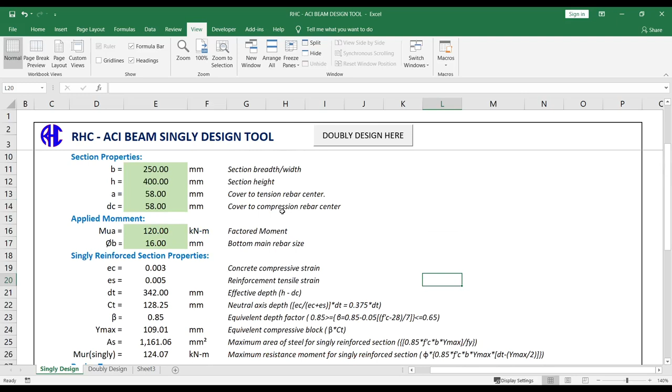Okay, then, of course, our Y-max, this is the equivalent compressive block, which is beta times CT, as you can see in the formula.

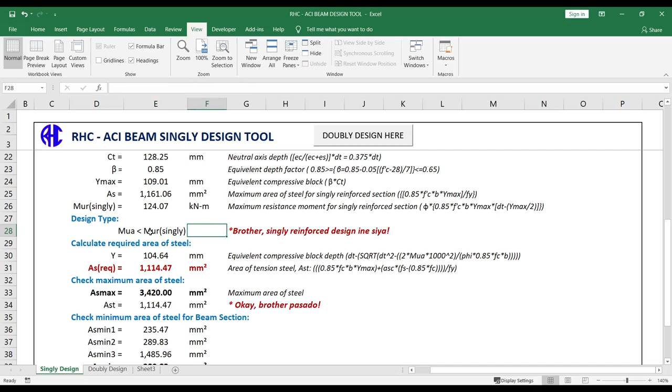Then for the design type, of course we have a condition. If MUA, that is our given moment or the factored moment...

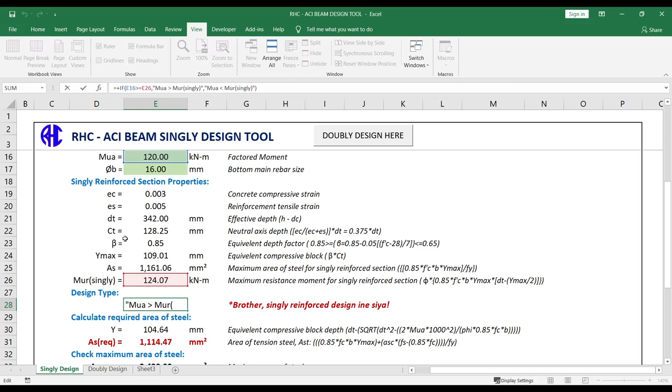the applied moment is greater than or equal to the computed moment for the maximum resistant moment for single reinforced section.

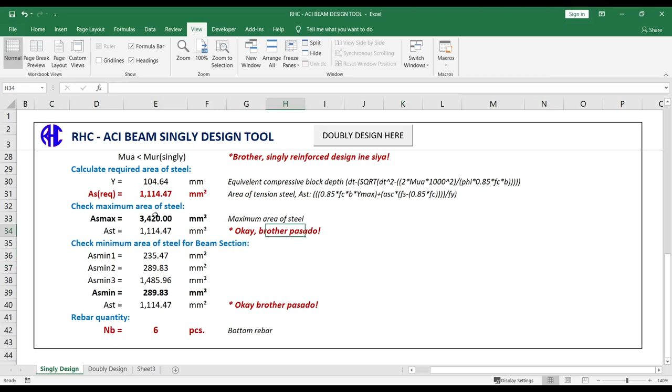Okay, then check natin yung maximum area of steel. Ito yung max natin, 0.04 times b times dt as per the ACI. So as you can see, as you can check in NSCP, iba yung ano natin doon, pero based din yun, yung NSCP based din sa ACI. Check na lang ninyo, okay, so kailangan yung i-estimate natin yung required, kailangan hindi lalampas dito.

Okay, so gumawa na naman ako ng condition if. So kapag yung E34, yung computed area of steel is less than or equal sa E33 or the area max, so safe siya, okay brother, pasado. Pero kapag hindi, not okay brother, increase section.

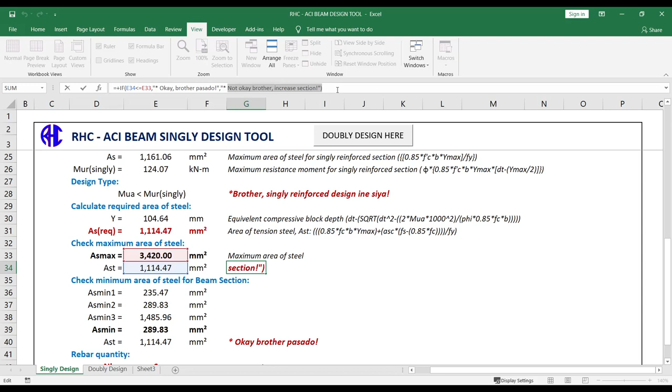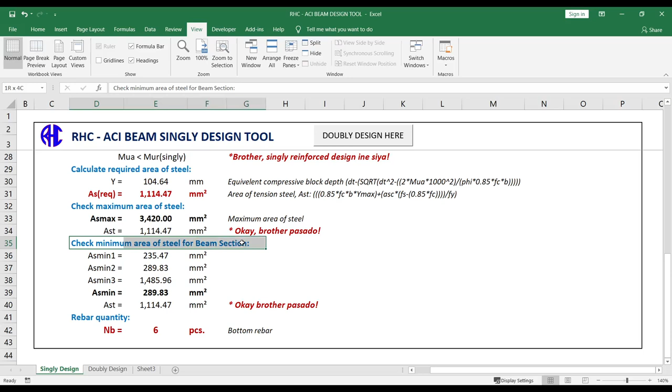Yan, then of course maliban sa maximum area of steel, kailangan din natin i-check yung minimum area of steel, kailangan hindi yan lalampas. Okay, so may tatlo tayo. Una yung 0.25, ito yung formula. Then pangalawa, yung 1.4 b times dt over fy. Then pangatlo, 4 times the area of steel over 3, or simply 4 over 3.

Then ito, hanapin natin yung minimum ng max of E36 and E37. So minimum ng max muna, hanapin natin sa first and second minimum. Then after that, kukunin natin yung pinaka-minimum ng result dito. Tapos yung sa A3, okay, so ang magiging kalabasan niyan is 289.83. So ito yung minimum natin, okay?

So ibig sabihin, pasado siya. Bakit? Kasi lampas yung computed o yung required area of steel natin compare sa minimum. Okay, then computing the rebar quantity, simply yung rebar quantity natin, ito.

Ast, so as you can see may mga pangalan na yan. Ast na yan is the required area na yan. Then As-min, so paano yan ang paglagay? Simply, ito, as you can see, pwede natin to ilagay NB. So kapag i-ano na yan, hindi na yan cell, NB na yan. Okay, so pwede ko yan sabihin 2 times NB. Pag 2 times NB is 12 kasi yung NB natin is 6.

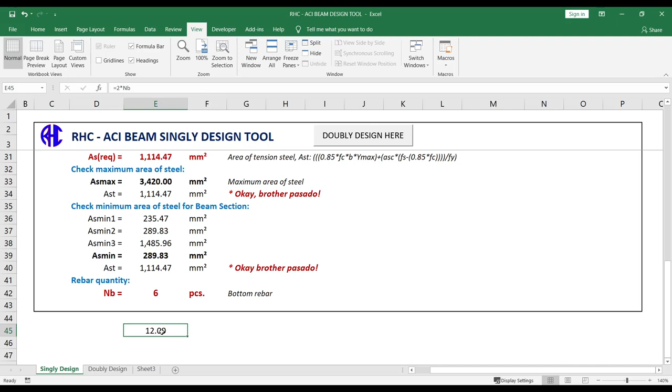As you can see in the result, so the design type is singly reinforced. Then yung bottom bars natin is 6 na 16mm sa 120 kN factor moment. So as you can see, bottom bars lang kasi singly lang siya.

So mag-try tayo, mapababaan natin yung height kung mag-double siya. So as you can see, nag-double siya. Then error na tayo, kasi nga this tool is for singly lang. So dapat pumunta tayo dun sa double design. So just click here, double, check natin yung double. Then mapupunta na tayo dito para sa double design.

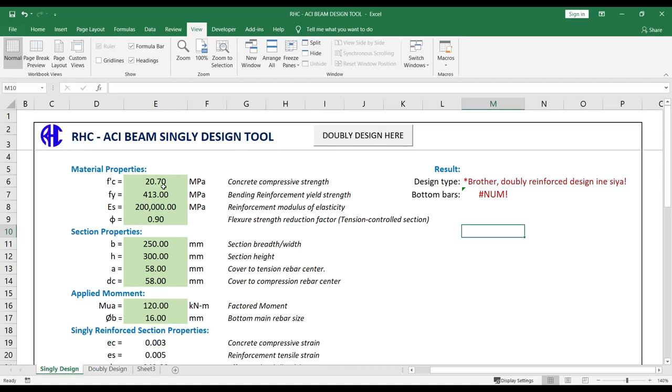So check muna natin yung data natin 413, 20.7. So i-input natin, then 413, then 300. Tapos yung moment natin is 120. Okay, okay na. So ang pagkakaiba lang dito is magkakaroon tayo ng compressive area of steel or compression.

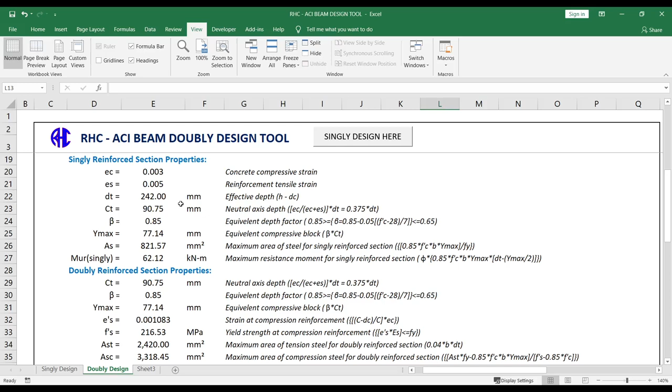Kailangan natin ng bars para sa compression para ma-resist niya. So kaya nagiging doble na top and bottom bars na.

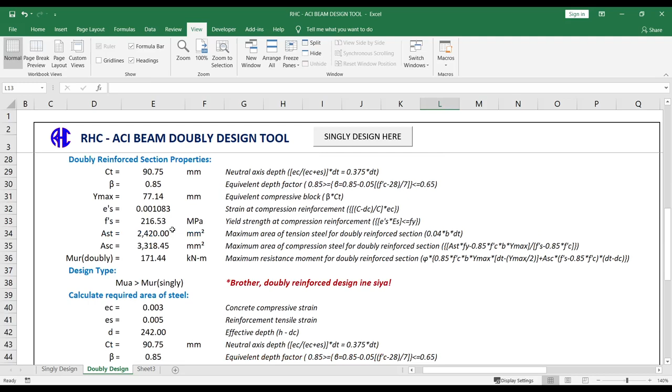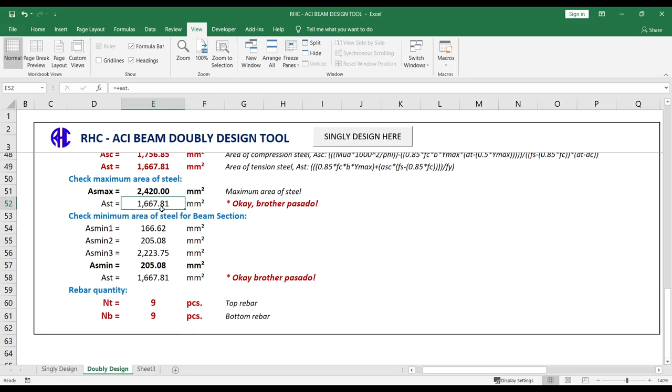So same din to yung process, and dito lang tayo iba, dito sa area of steel. Saan na yan? Area of steel, ito yung dalawa. So ito yung formula natin, medyo mababa, tapos yung steel. Okay, so nandito naman din sa right side, pwede niyo yan i-check.

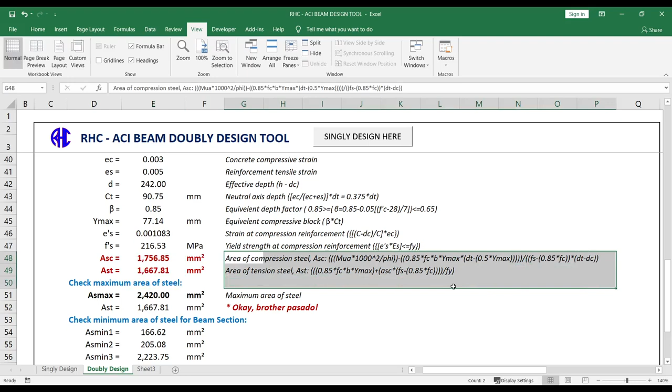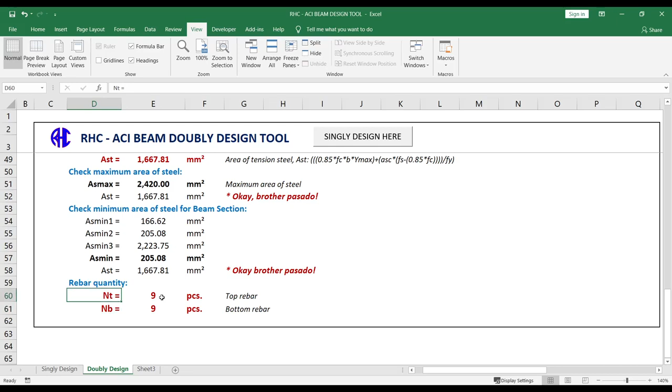Okay, so as you can see, the rebar quantity, mayroon na tayo NT, then NB. Number of bars sa top, then number of bars sa bottom. Then punta tayo dito sa result.

Okay, the result, the design type is double. Then the top bars, 9 na 16mm. Then the bottom bars is 9 na 16mm, then siyam na bottom bars.

Once na i-change natin isa, for example sa top bars, gawin nating 12. As you can see, ito na, higit 16 na 12mm. Pero try natin 20mm, so as you can see, nagre-reduce. Okay, so i-try natin yan, gawing singly.

So let's say 350, so doble pa rin. So 16, gawin ko ito, 16. Okay, doble pa rin, so 200 natin, doble pa rin. So kailangan natin na-increase yung size, no? Okay, kaya na-increase natin yung size para maging singly.

So 450, so as you can see, singly na siya. Then yung top bars natin is 0. So ibig sabihin, singly, sa bottom bars lang yung natin sa beam.